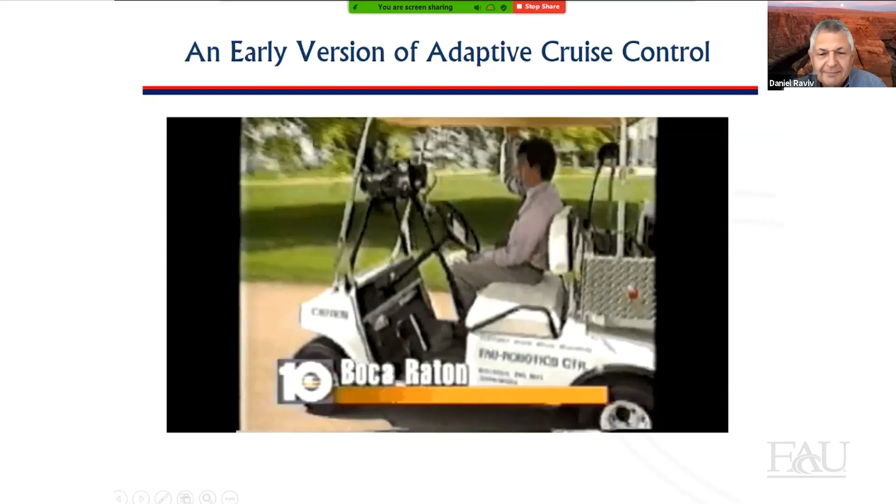It may look like a simple golf cart to you, but this is the car of the future, say researchers at FAU. You really want to see cars on the highway driving by themselves. You want to see a driver busy with his fax machine, watching TV, singing, eating, whatever, and the car takes him from Boca Raton to Miami.

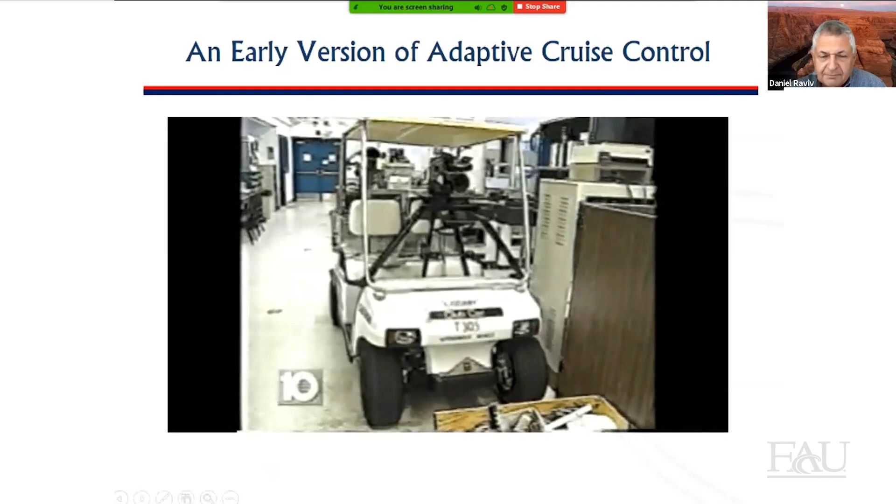As simple as that. Lumi, as the cart's called, could be the future of hands-free driving. While this car of the future senses motion in front of it and can travel and keep a safe distance, there are a distinct set of problems to overcome before we could be driving a car with this technology.

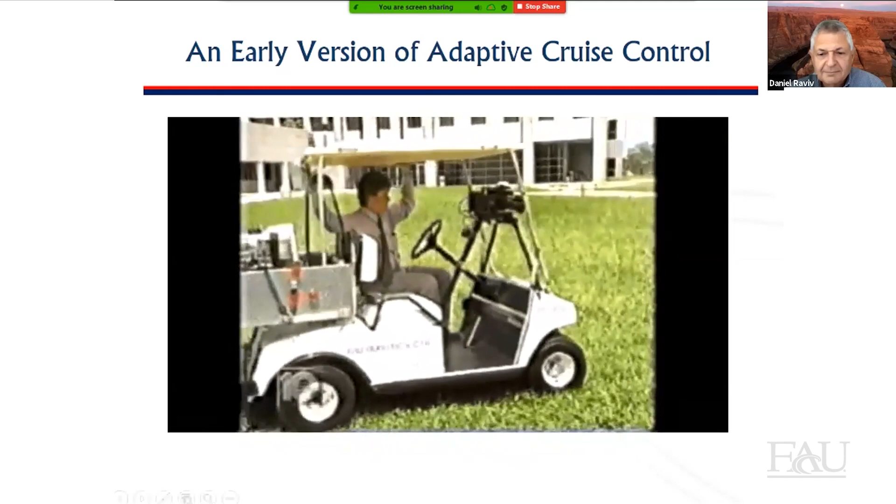Snow, fog is a big issue. Unexpected thing on the road. Also, who's to blame if you have an accident? Liability, especially in the US, is a big issue.

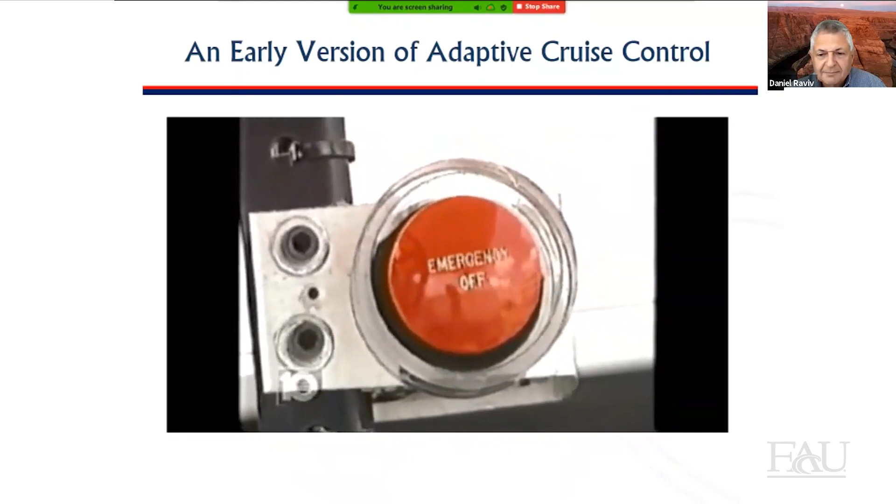So I hope you recognize the voice of that person.

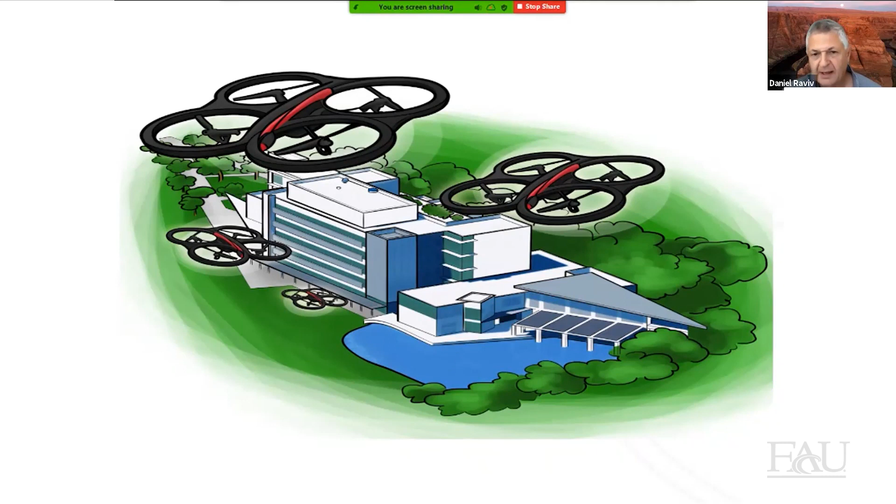Anyway, imagine now that here we are FAU. This is the engineering building, the new engineering building, Engineering East. Imagine that in a few years, and believe it or not, it's going to happen one way or another, we are going to be surrounded by many drones. And the drones, who knows what they're going to do? They're going to watch us, they're going to help us. And if you come with your car and you're carrying a very heavy package, then the drones will come and say, oh, may I help you? And of course, you're going to agree, and the drone will take the package, and then the building will recognize you, that it's you, Joe. We'll say, welcome, Joe, and we'll take you to the elevator, etc., etc.

So science fiction, as we used to think about it, is about machines that can talk and sense and think and act. But we called it science fiction. And remember, this is, for example, R2-D2 and C-3PO from Star Wars, in the imagination of George Lucas. And this is only an example. There are many things which relate. You can go back 2,000 years ago and find science fiction, actually. But this is sort of most recent, 50 years ago or so.

Here is from 1969. You may have seen that.

These are the controls of the most powerful and amazing racing car in the world, the Mach 5. Control G releases a homing robot from the front of the car. The homing robot can carry pictures or tape-recorded messages to whomever and wherever I want to send them. The Mach 5 is the most complex and ingenious car ever built. A tribute to my father's imagination, genius, and technical skills.

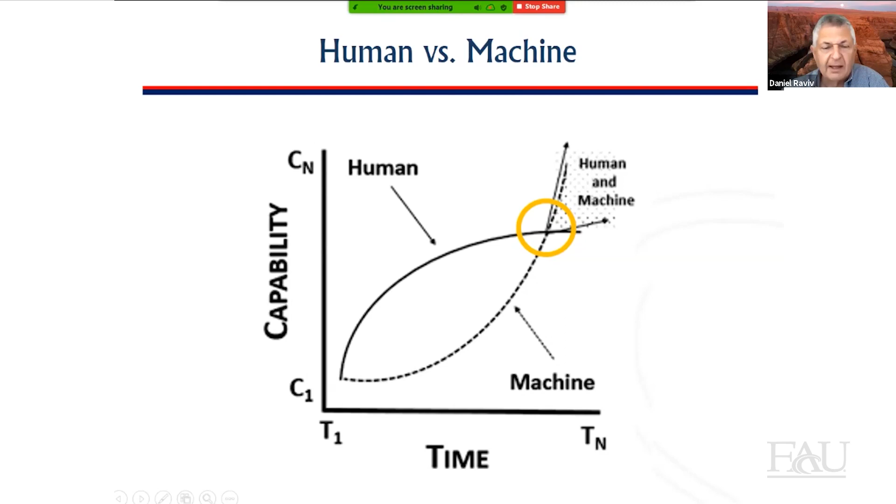On the time scale, the top solid line represents human kind of ability or capability. The dotted line, going up almost exponentially, is usually below human capability, but at some point—very close to where we are today—the machine becomes smarter, quote unquote, than human. The machine's capability becomes higher than human capability. So, is it a revolution, or a tsunami?

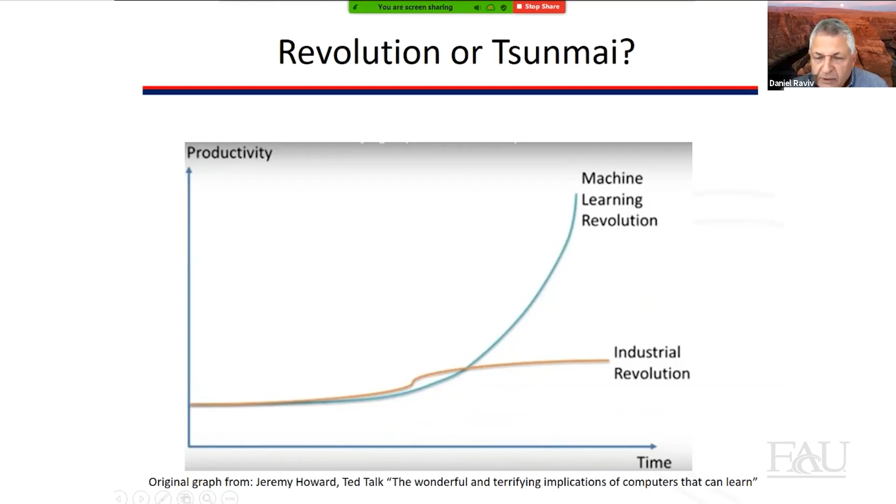Let's talk about machine learning. Ability to learn without explicitly being programmed. So you can tell here that it's not programming per se, it's the machine is able to learn by itself.

Where did it start? It started with Arthur Samuel at IBM. We call him the father of machine learning. In 1962, Arthur Samuel was able to show that his machine can play checkers and win. This was a big deal, which obviously affected the stock market, especially for IBM. There was a huge jump in the stock of IBM at that particular time. He developed a program that was able to be better than the champion at that time by playing checkers.

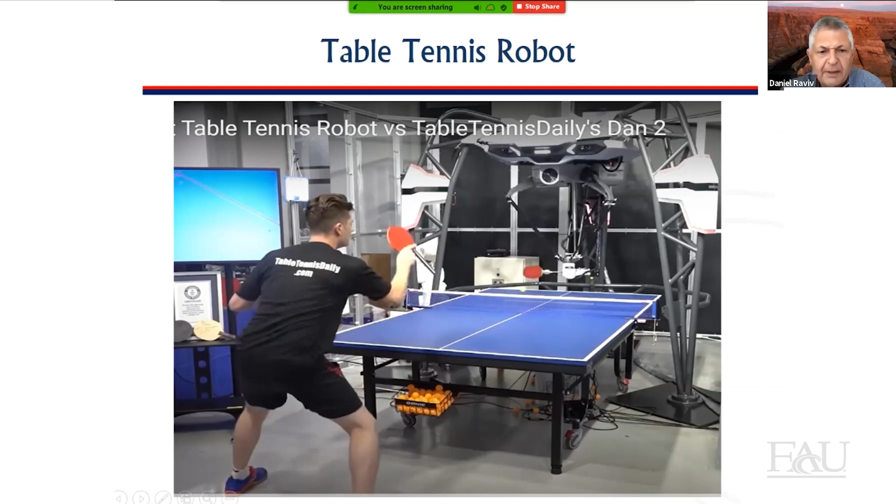This is a table tennis robot that can learn how to play against an expert. Let me show you — this is Dan versus Forpheus. Okay, 0-0. Getting better. This machine, the judge we just saw, can learn by itself and improve itself to play table tennis better and better.

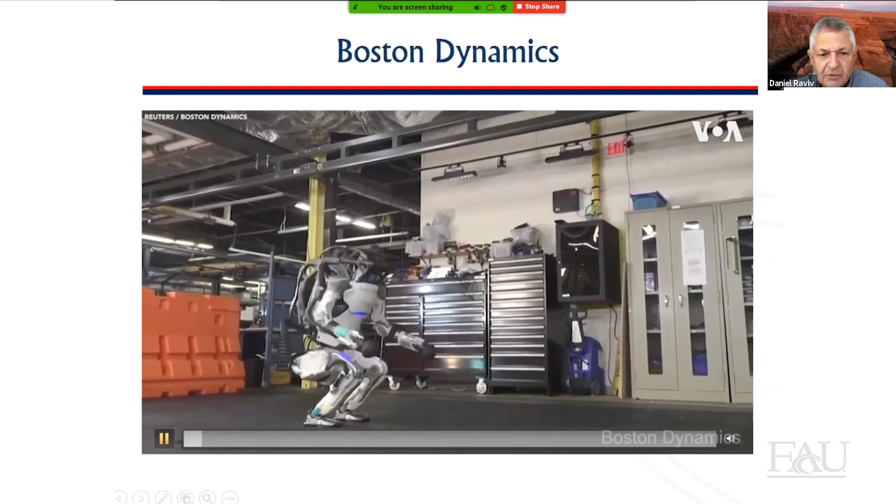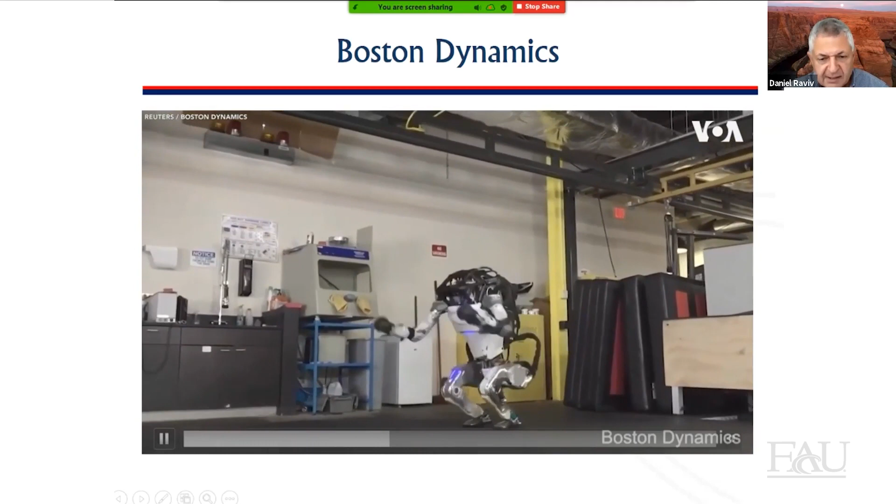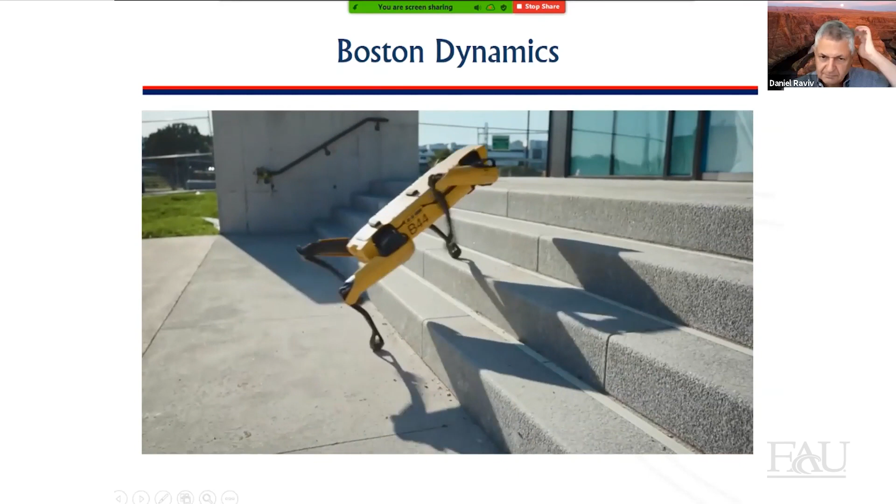Boston Dynamics came with something that can learn from the whole building from the inside. It's a completely new way for computer programs to interact with the physical world, automating tasks that would otherwise be impossible to do without a human being.

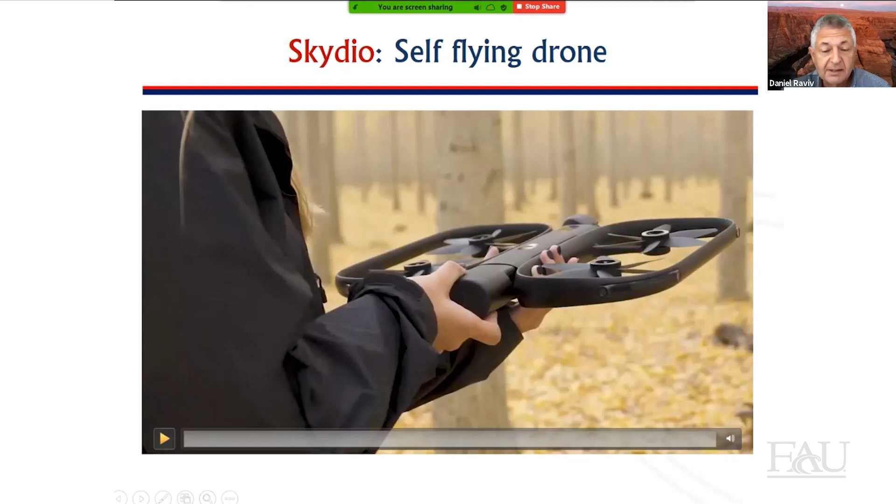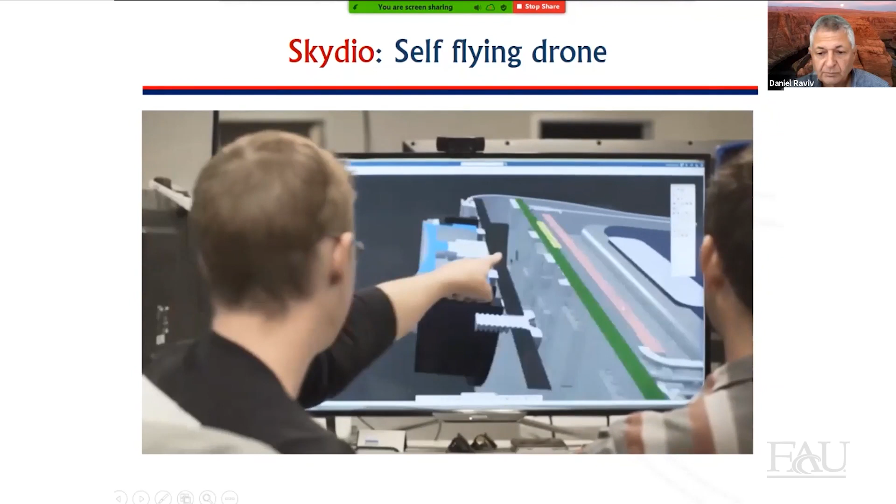And Skydio, a company by the name Skydio, was able to develop a drone that can follow you no matter where you go. Amazing, amazing, amazing thing. Our initial focus has been to deliver on that promise of the autonomous flying camera and to make it real — basically to create a film crew that fits in your backpack. It's a camera that understands the scene it's looking at and has the ability to move itself. Those two things together are enormously powerful. This is a very ambitious product, and to make it possible we had to develop custom hardware. We built a device with 13 cameras that see in every direction, and at its core it uses an NVIDIA TX1.

There are limitations of this neural network. One of them is they need many examples. They can be easily fooled, and so far they are domain limited, meaning that they are good for finding a donut, good for finding a rabbit, an elephant, but it's not really general purpose.

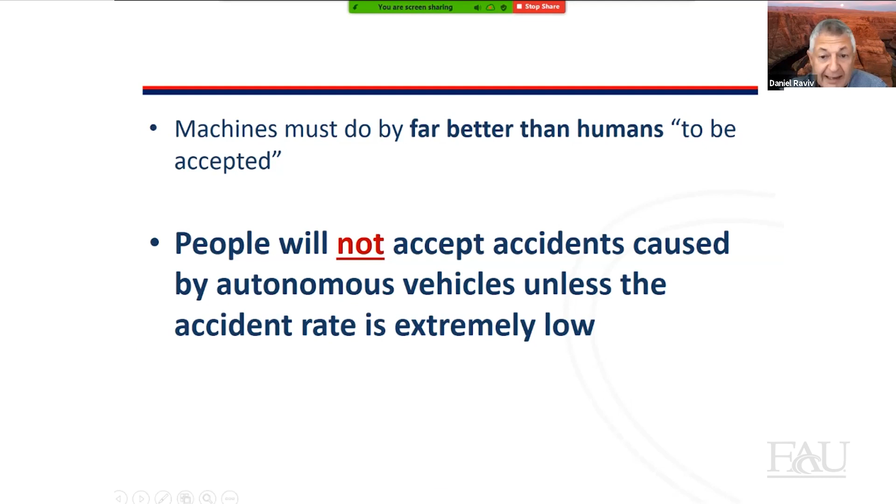But there are many important issues way beyond hacking. Security, safety, ethics, and privacy are big issues. People are not going to accept accidents caused by autonomous machines unless the accident rate is extremely, extremely low. Here's an accident by Tesla in 2019.

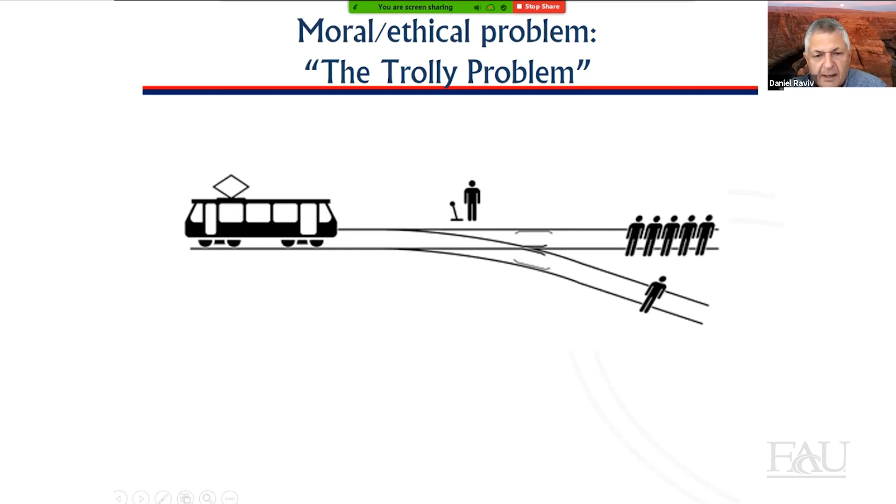And of course, there's always the dilemma: what should you do? You're in a trolley and you have a choice. This is called the trolley dilemma. Keep going and kill 5 people in front of you, or turn to the right and kill only 1 person. What should you do? If you do nothing, you hit the 5 people. If you turn right, you save those 5 people and kill that one particular person. There's been lots of debate on that for very many years, and more to come.

Google workers, there was some rebellion, at least as seen in the news in 2018. They did not like some of what the company was doing, and many of them decided to quit because of ethics.

The United Nations also started to have some regulations, and they have a committee on that. The committee was established in 2017, and in March 2019 they reached a conclusion: autonomous weapons that kill must be banned, insists the UN chief.

So what do we need to do? We need to do many things: research, education, and more regulations. Believe it or not, yes, regulation - otherwise it will go crazy.

Research, not just in science and technology - we need to do research in philosophy, psychology, liberal arts, etc.

Education - we have to understand the implications of our new future. Privacy, what does it mean? Privacy, or lack of privacy, is a big issue - the big brother issue, communication methods, etc., and misuse of data is frightening. If someone decides to misuse the data which is collected, and a lot of stuff is collected, many good things can happen, but also sometimes not good things.

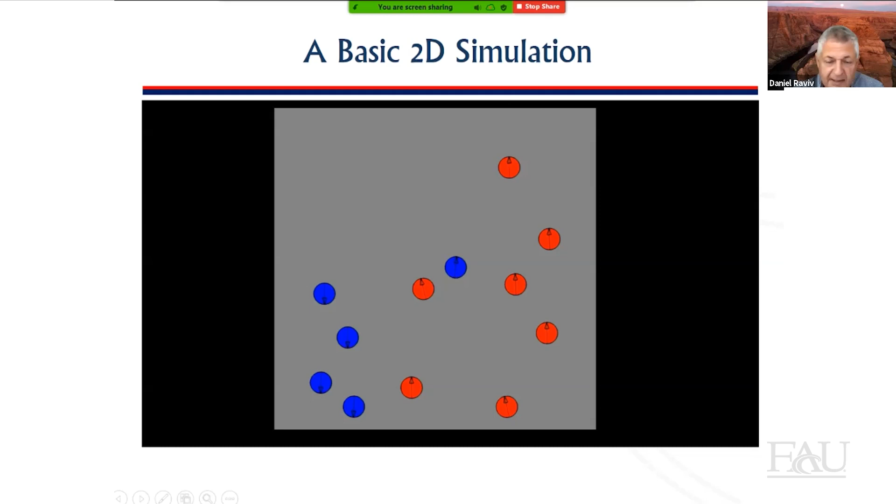Yes, it doesn't work all the time. Sometimes the blue one on the right is stuck, cannot find its way to the other side, but this is part of what we have. It happens if you go to places where 2,000 people are going one way and another person is trying to go the other way, you see what happens. The person has no choice but to turn around and join the crowd.

This is something we developed here. This is by Juan Yepes. He developed it here as part of the project. This is FAU, from simulated FAU, flying with a drone above FAU.

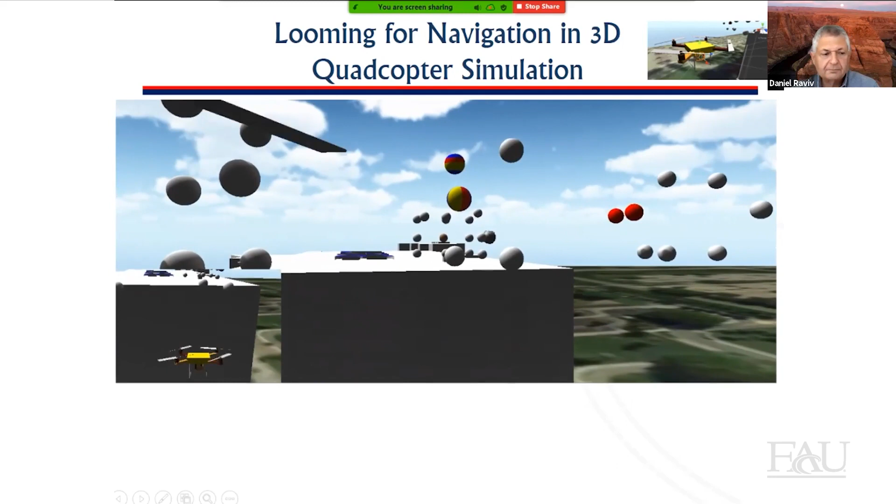The algorithm here is based on very simple principles, what we call thinking like a fly. Danger zones, or dangerous zones, you can see in red or dark red. If you see blue, it's not dangerous. So we are able to divide the space during motion into something which we should care about and something we should not care about. What we care about, we should avoid, but if something is not causing any problem, why should we bother?

Back to the Hanoi intersection, we try to mimic the same algorithm, or do something like the Hanoi intersection. Let me show you what we have so far.

We have what we call visual fields. These fields surround any moving object and can tell you what is dangerous and what is not. If it's dangerous, avoid it. If it's not, keep going.

The red region, what's in front of you, is something you have to worry about. The blue one behind you, you don't care. Here's another one, also similar to the Hanoi intersection, also developed by Juan Yepes.

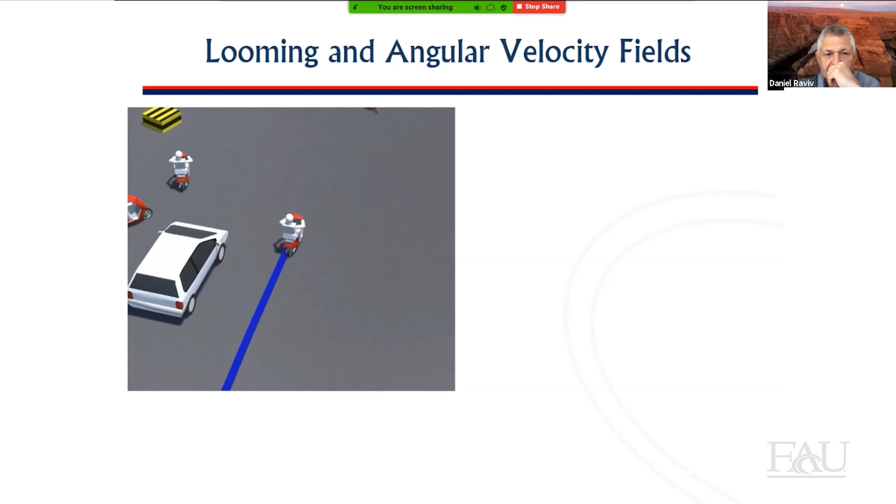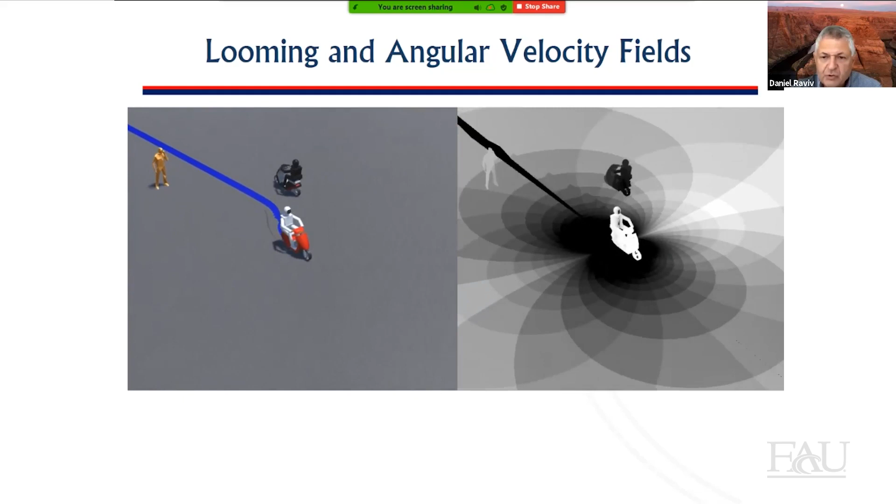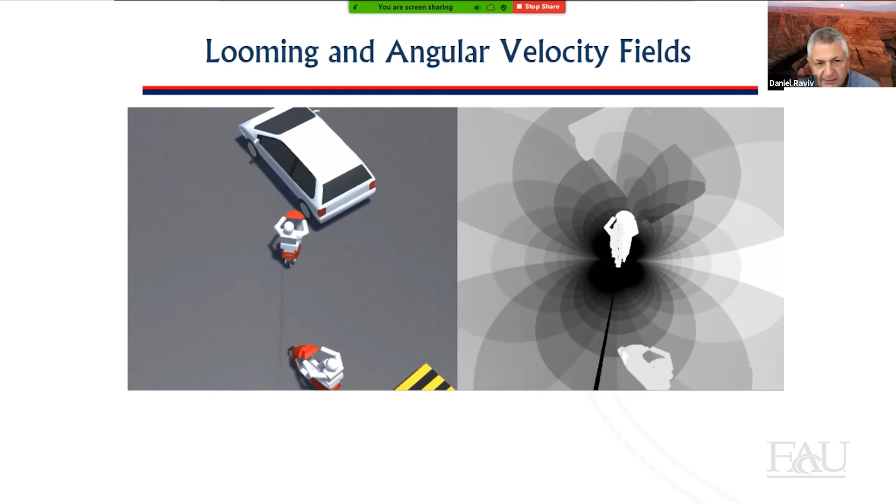And this is superimposed on a visual field. So the visual field we developed, you can see them in a way superimposed. It's not really superimposed, it's side by side, showing how the visual fields relate to the actual motion that we can see on the side. The algorithm, at least in this simulation, usually avoids collision. There were a few things we still have to fix, but we are getting there at a nice pace.

Special thanks to a PhD student right now at FAU, Juan Yepes, who joined me to do this research. We've been working on this way before he came here, almost 5 years ago. He joined me at the Technion during my sabbatical, and now we continue the research. Thank you very much.